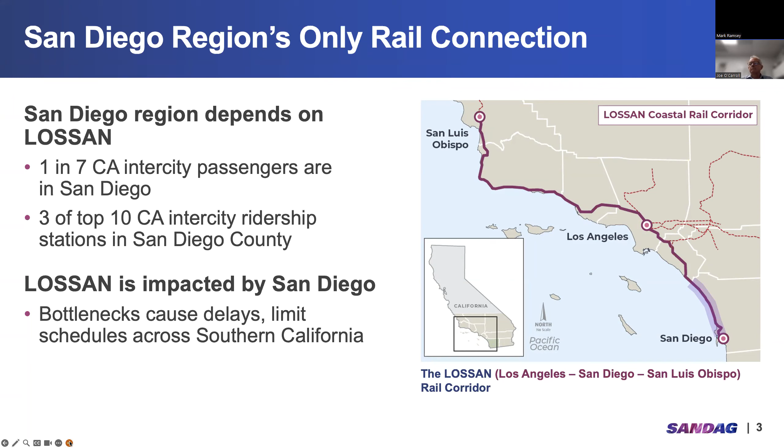And with rail corridors, it's a little bit different than highways. There are bottlenecks that exist here in San Diego and bottlenecks in other parts of the corridor that limit schedules across Southern California. So the single track bottleneck in San Diego limits how much train service can be added all throughout Southern California. We're all connected. Go to the next slide.

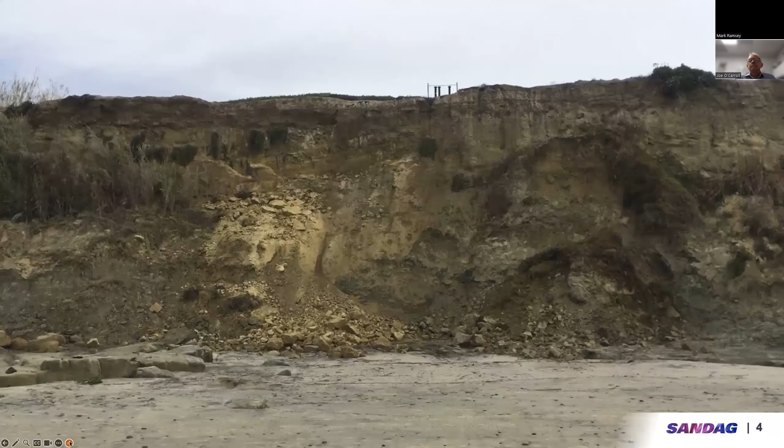And we wanted to share a video because if a picture says 1,000 words, this is just exponential. Many of you in Del Mar are familiar with how close the train is to the edge of the bluffs here in Del Mar. It's just inches away. This is vulnerable infrastructure. This was a video from 2019 that was captured and provided by the Scripps Institution of Oceanography that demonstrates a bluff collapse in Del Mar. And the rail corridor is right on top of those bluffs.

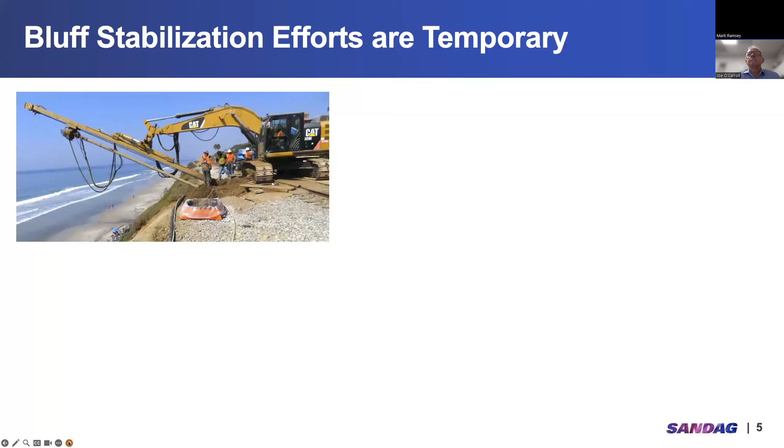This was a relatively minor bluff collapse, but this is a very common occurrence. We've seen up to 6 inches of erosion per year. And we've spent a lot of time and effort to stabilize the bluffs. All these bluff stabilization efforts with piles and tiebacks and seawalls and drainage improvements, they're all temporary. We do need to find a permanent solution to keep this rail corridor in operation for the long term.

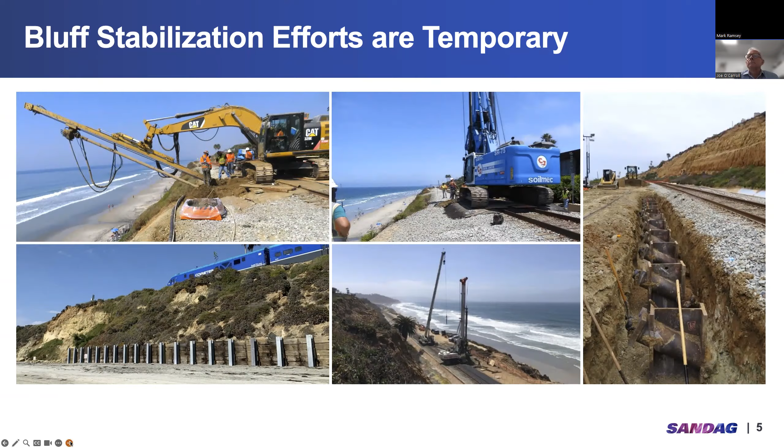And the next slide shows a timeline over the last 20 years or so of the stabilization efforts. And what you can see is we're about to start phase 5 of Bluff Stabilization. And in total, we've had over $100 million of investments just to keep these bluffs stable and safe for trains to operate. But it's not the ultimate permanent solution, which is to ultimately relocate the tracks.

And the little icons you see on there, little yellow diamonds, represent bluff collapses that have occurred that have impacted rail service where the train is shut down. It makes it less reliable. And then we've also had emergency repairs in response to some of these bluff collapses. So this is a constant maintenance issue, and it takes a lot of resources to maintain the tracks on the bluffs.

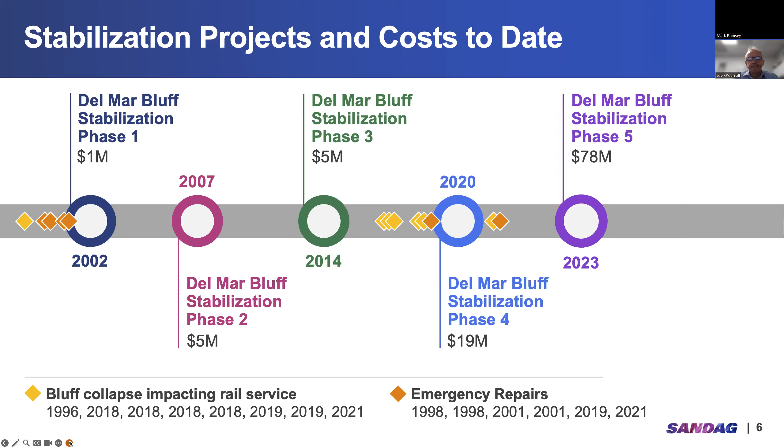Next slide, please. And it's not just the bluffs. We have other vulnerabilities all across San Diego. We have old bridges that are a century old. And these are wooden trestles that are beyond their useful life. It takes a lot of money to keep them stable and safe. And we have plans to address all these vulnerabilities, and we have funding. And pleased to announce that Batiquitos Lagoon was recently funded by the state of California to be replaced. So that bridge will be the next one to be replaced with modern, resilient, safe concrete bridges.

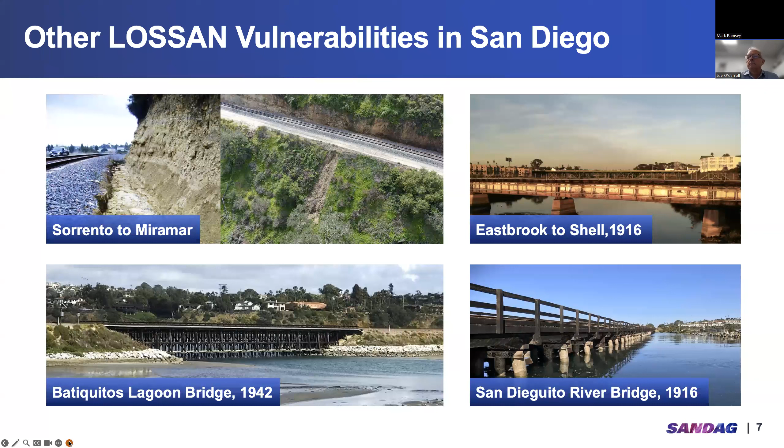And it's not just about keeping the rail corridor safe. We're investing in this corridor. The region has committed to investing in the LOSSAN corridor as part of the Transit Leap vision. So the 2021 regional plan identified the LOSSAN corridor as that long-term, fast, safe, reliable, and resilient rail corridor, that transit service that can connect from where people live to where people want to go conveniently and reliably.

All these investments, so it's not just the realignment in Del Mar, it's all the other double tracks, the upgrades of the bridges, will result in a Surfliner train once per hour in each direction all throughout the day, and Coaster trains up to 3 of them per hour in each direction. Ultimately getting to a travel time between Oceanside and downtown within 33 minutes. So that is the vision for 2050, and it's talking about zero emission trains.

And it's really a fundamental change in what this rail corridor is, because if anybody rides a train now, there's large gaps in the service. I hear people say that it's not frequent enough. Well, this plan that we have, the Transit Leap vision, will address all of those. Next slide, please.

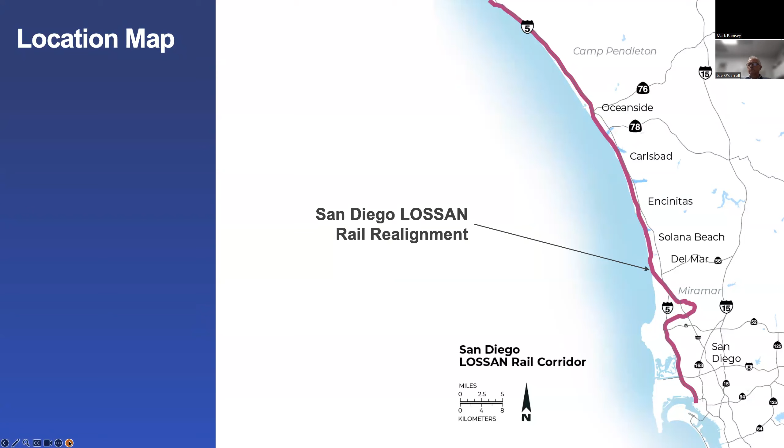So thanks, Danny. Yeah, I think it's important, right? We've put out what our goals are as we're thinking about this project, but we want to hear from all of you. What's important to you when you think about the realignment project? For some, you're really thinking about how can we move people and goods up the I-5 corridor on the rail corridor? Are you looking for a safe and reliable way to ride the train? Are you worried about climate change and how that's going to impact our ability to have a rail corridor, whether it's for freight or for people?

Are you trying to get to LA faster on the train? Are you just tired of seeing all the work that we're doing to stabilize the bluffs and want us to move forward with a long-term solution? What really resonates with you when you think about this project? Let's see what our answers are. Let's see.

Okay, it looks like more than a third of folks said faster travel by train was their top goal for the realignment project. And that's followed by building resilient infrastructure in response to climate change. Danny, are you surprised by any of those answers?

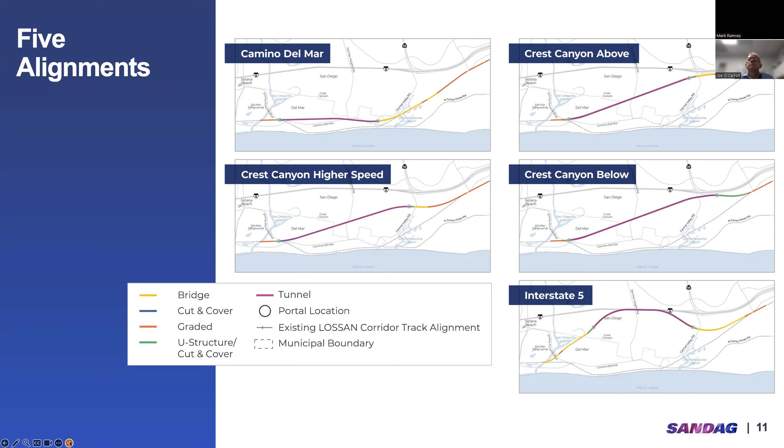All right, so let's continue on to the next slide here. Okay, so in August, we released and publicly posted our alternatives analysis, and in that analysis, we analyzed 5 different alignments, and those are shown here on this screen. And we identified whether there's tunnel locations or bridge structure, and identified where those portal locations are. A portal is essentially where the tunnel goes from above ground into below ground. So we have these 5 alignments that we studied, and we'll go on to the next slide.

So we've presented that information previously, but we also heard from the public about this one as well. And we have a couple clicks on this one, I believe, but these 3, yeah, for this first one here. So these 3 portal options were first identified and presented, but we also heard that, hey, we want to keep these portals away from private property and away from homes. And can you look at other options for where these portals could go? And so we did that as part of this study, and that's shown on the report on our website.

So we looked at what it would take to put a portal in the fairgrounds, or near the roundabout there on Jimmy Durante, or up by Crest Canyon over there on I-5. And we've studied that. That is in section 3.6 of the alternatives analysis, and definitely point you to the website to read more about all the pros and cons of those.

And then we have one more click, and we have these other portal alternatives that we looked at and are continuing to look at in a lot more detail right now. These are on the north side there, which is on the left side, a portal location that would be basically away from private property and under the roadways of Jimmy Durante and Camino del Mar. So basically under that intersection, and that has different trade-offs, but addresses that comment that we've heard about keeping the portals away from private properties.

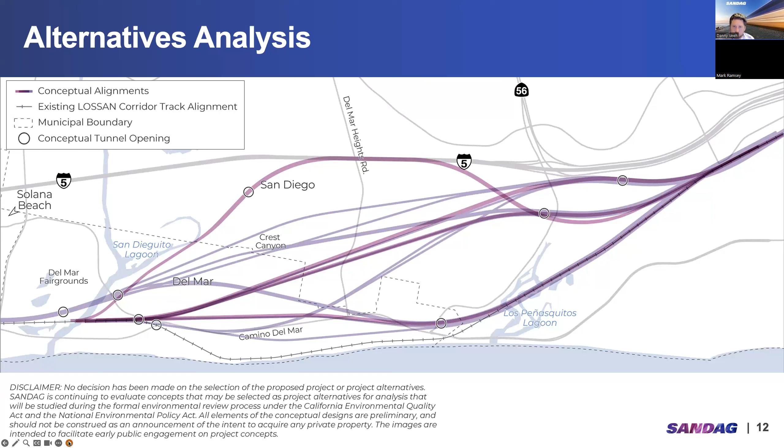That's right. Yes. Meaning we're studying all of these different options, and we also want to hear if there's other options we should be considering still. That's right. Okay, thank you.

And there's really no way around the hill in Del Mar unless it's on the bluff. And we've talked about the issues with maintaining the tracks on the bluff. So really the only way to do that is to put it in an underground tunnel. And the other thing is surface impacts. Sure, we could probably build a large bridge or grade a big berm somewhere. But our goal of the project is to minimize surface impacts. And the best way to do that is to put the infrastructure underground. That's why we're considering a tunnel in this environment.

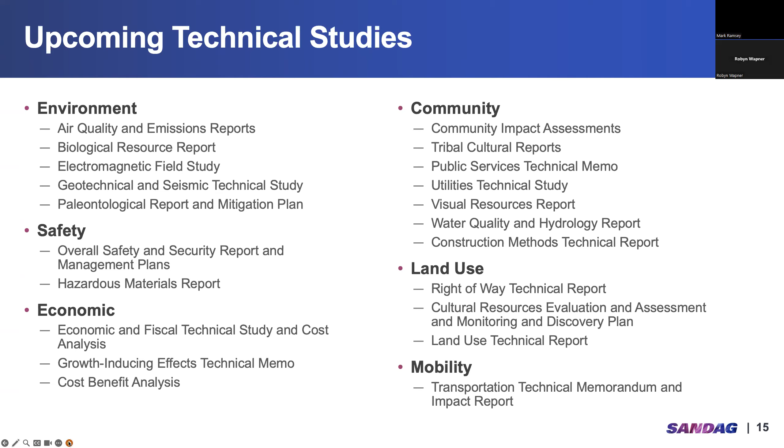And we have a lot of work to do over the next several years as we continue to study these alignments and these alternatives. This is just a list of some of the technical studies that the technical team will be working on from now until 2025. And next, I wanted to just pass it off to Joe, who will talk about tunneling.

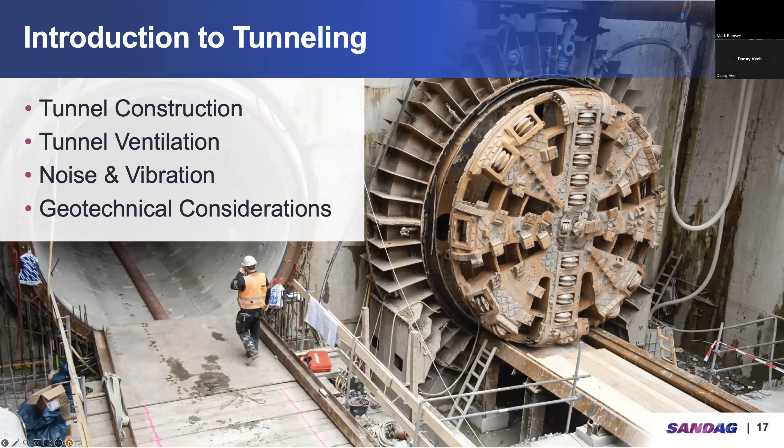Thank you, Danny. Good evening, and I'm pleased to have another opportunity to talk with everyone. At some of our previous meetings, we've heard a lot of good questions, but I know we have a much broader audience, I see from the polling earlier this evening. So in this brief presentation, I'll address a lot of the questions that we've heard to date, but characterize them in four broad categories: tunnel construction, tunnel ventilation, noise and vibration, and also the geotechnical considerations. So let's jump straight in.

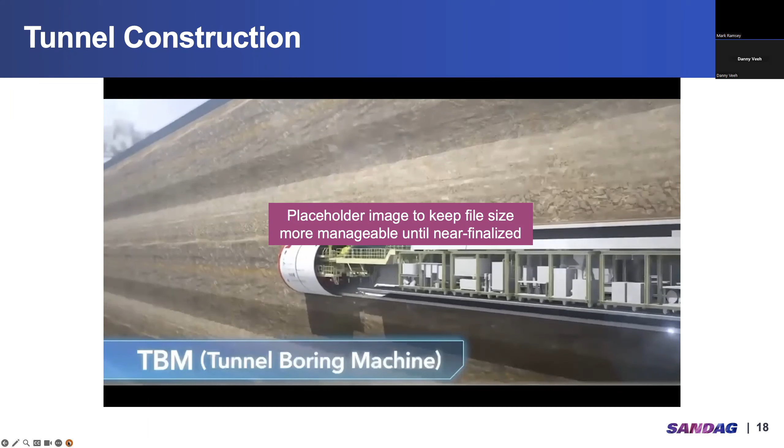There are various methods of excavating a tunnel. The choice is usually driven primarily by the ground conditions, but also by the length, the size, the location, and the cost effectiveness. But here in Del Mar, our primary concern will be the safety and control of ground movement to avoid any settlement or other impacts to property, structures, utilities above the tunnel. And we know that this is best achieved using a tunnel boring machine. So I'm going to explain a little bit more about that.

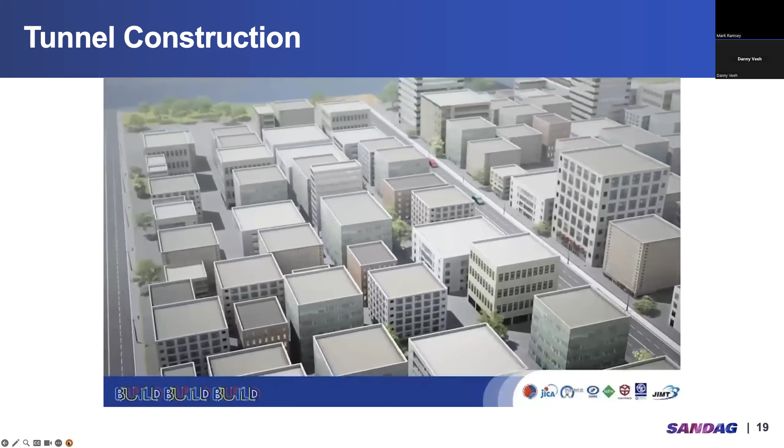So think of the tunnel boring machine as an underground factory moving through the ground, building the tunnel behind it as it goes. Each step in the process is designed to support the ground in front of, around, and behind it, preventing any settlement occurring above the tunnel at the surface. The excavated ground passes through a rotating cutter head, as you see on the screen here, and into a chamber behind it, then extracted out through a screw conveyor.

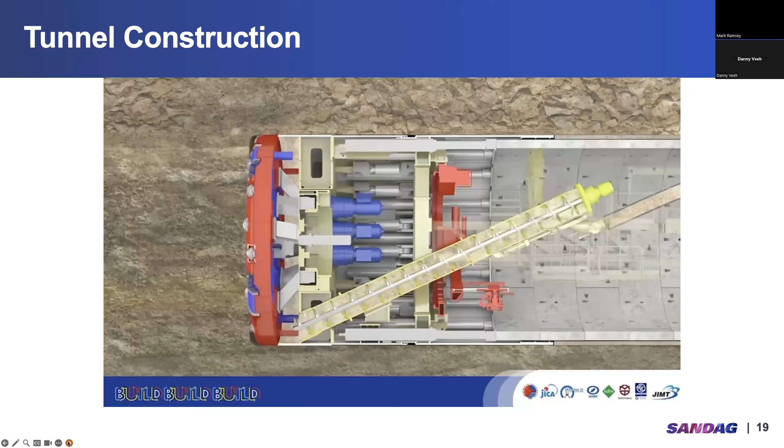With the soil in the chamber and the screw conveyor working in harmony with the TBM advancing, you have a very controlled method of excavation. Additives are also injected into the cutter head to help condition the ground to always maintain that pressurized plug that you see in the screw conveyor. And this is what we call earth pressure balance TBM tunneling.

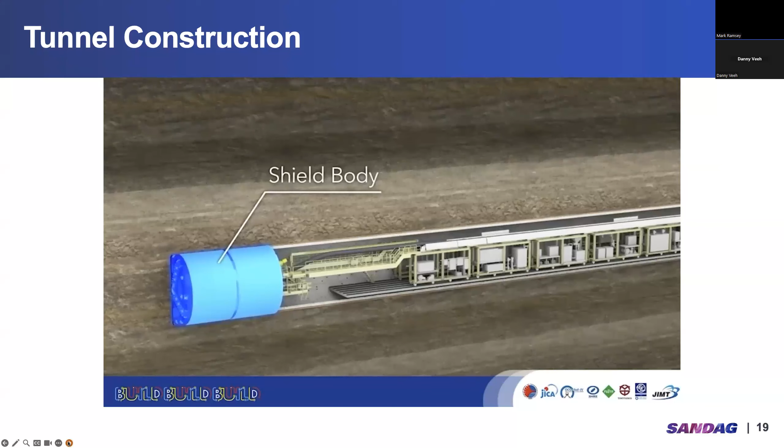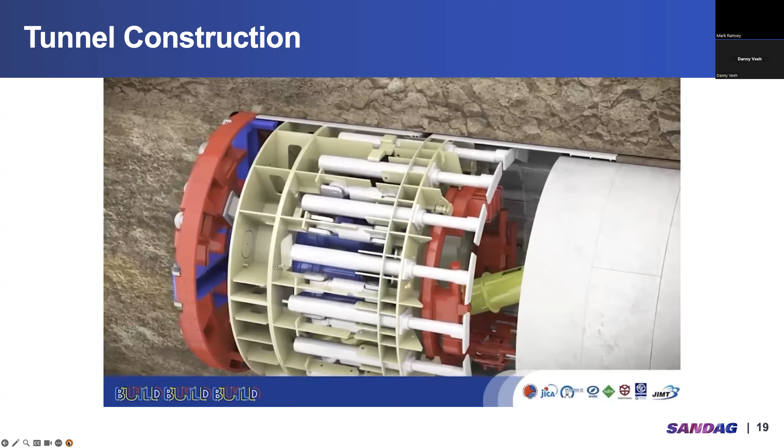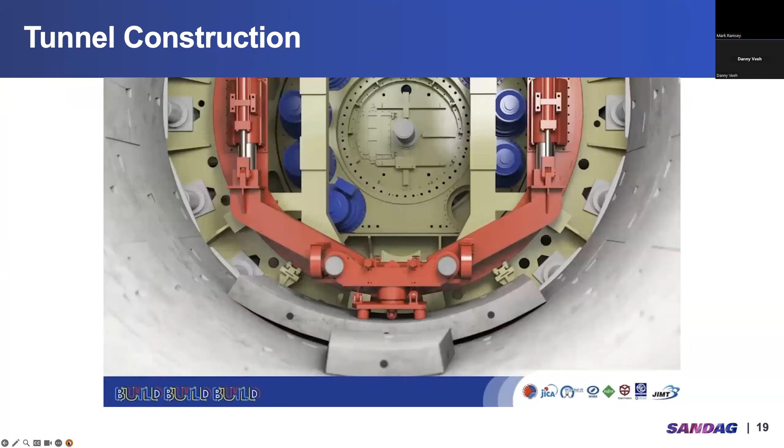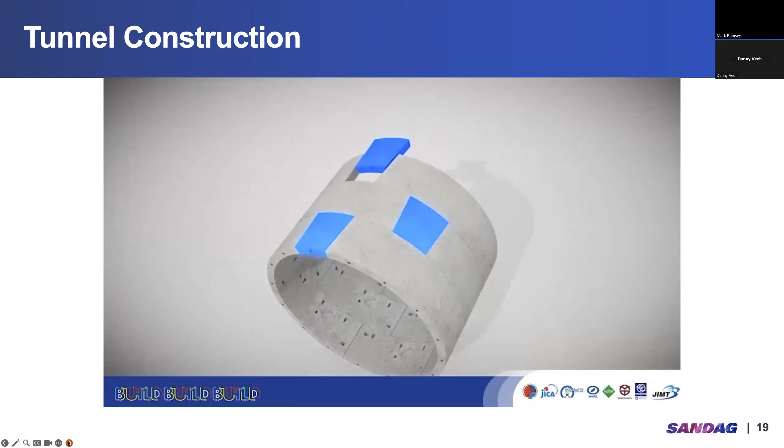The TBM has two main parts, the shield body and the backup system. The TBM is propelled forward using a system of thrust jacks. And the tunnel lining is built using precast concrete segments bolted together within the shield. The whole cycle is repeated ring after ring after ring. And when all this works smoothly, we expect to be able to build this tunnel at an average rate of about 300 feet of tunneling a week.

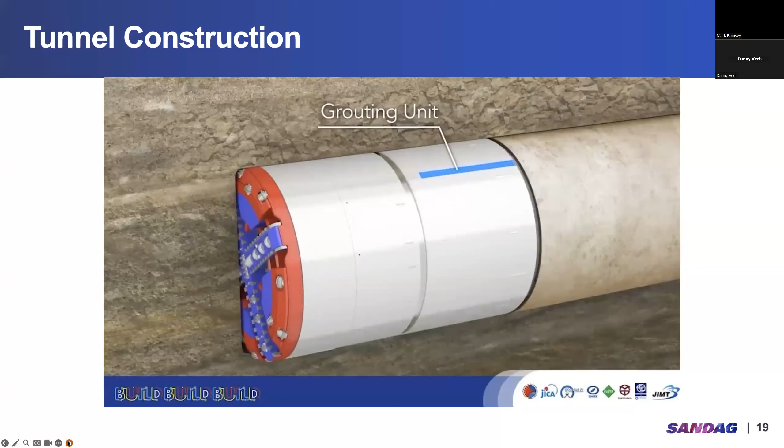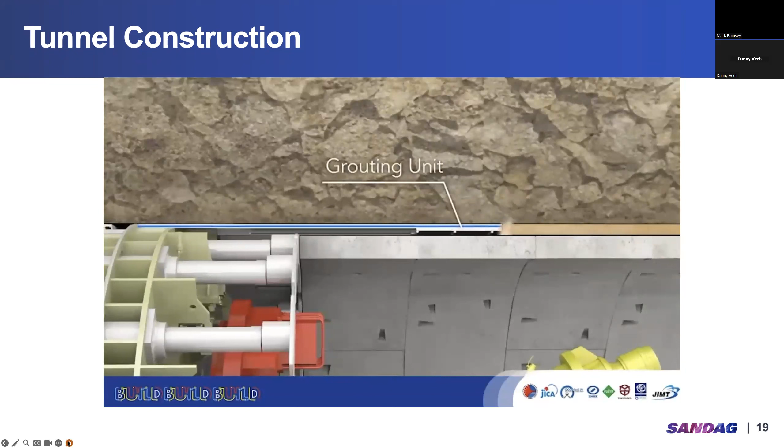Filling the gap behind the tunnel lining is really important. And we do that with a cement grout. This actually prevents any movement from occurring after the tunnel is built. We think of this as leaving no gap behind. Everything is solid and integral with the ground around the tunnel, eliminating any settlement being able to happen after the tunnel is complete. If we go to the next slide there. Thanks. So now that we know a little bit more about how the tunnel would be built, let's talk about the depth and why, as Danny mentioned, the topography here is really in our favor.

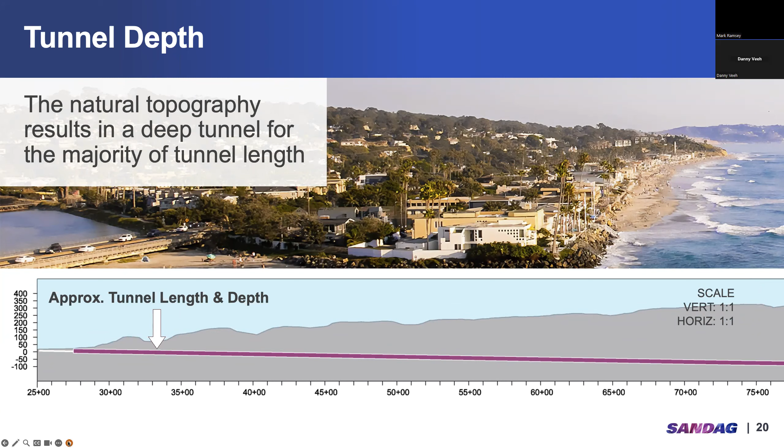To put this in perspective, I spent 5 years as an engineer on the Channel Tunnel between England and France, and we had a similar amount of ground cover as we see here, but to the underside, the bottom of the ocean. So, we're very, very confident about the tunneling, this technology in the ground conditions that we have already begun to really understand in Del Mar.

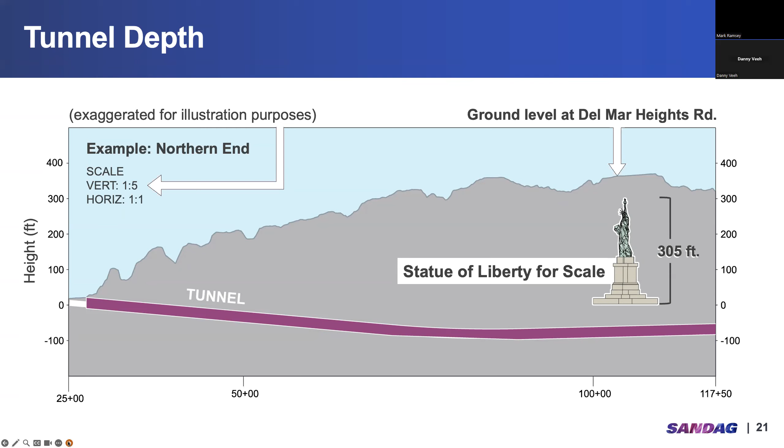Next slide. At previous meetings and probably in the alternative analysis report that is on SANDAG's website, you will have heard or read about options that are being studied, and this includes terms such as a single bore and a twin bore tunnel. In a single bore, we'd have both tracks in one larger tunnel, separated by a dividing wall that acts as protection and for safe emergency egress and evacuation.

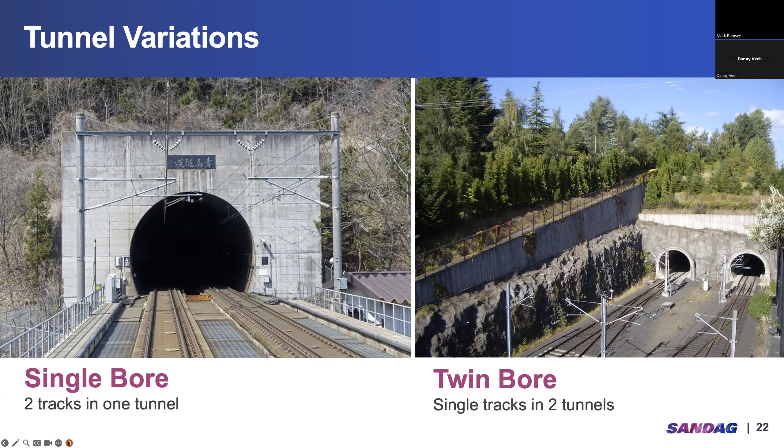Next slide. So whether the selected option is a single bore or a twin bore solution, the size of the tunnel is well within the envelope of current TBM, tunnel boring machine technology. We've probably designed and built over 200 tunnels of this type just here in the US and around the world in the past decade or more. One such example, which is ongoing at the moment, is the Hampton Roads Tunnel in Virginia.

This TBM is named Mary, actually, and it's tradition to name TBMs these days, and we usually invite children in the local elementary or middle schools to come up with a name. We found that giving them a connection to the project, and they can go online and track progress, is really valuable to community understanding of what's going on beneath them.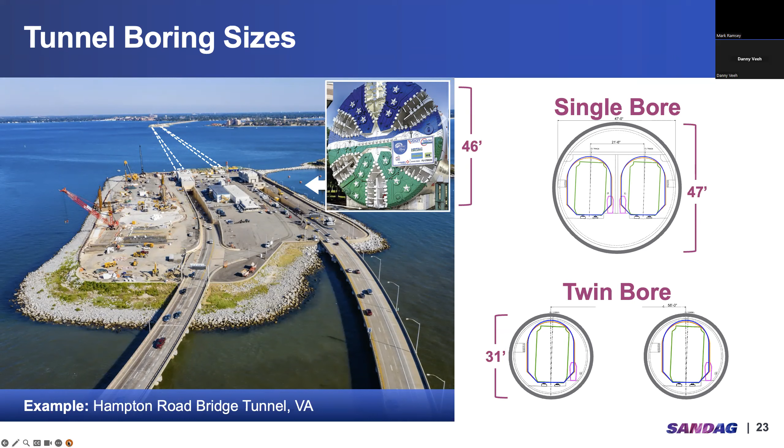So it doesn't leak, and we make sure we don't have any impacts on the groundwater table, which is really important, particularly at the south end of the tunnel in the lagoon. So this type of tunneling is also environmentally friendly in that respect.

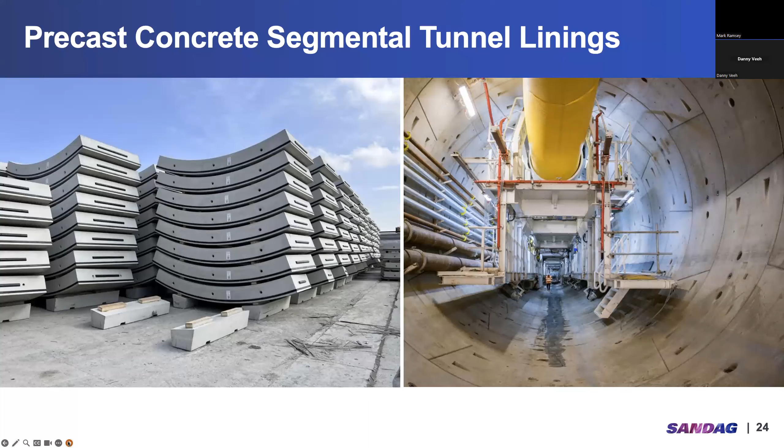The picture on the right is looking at the back of the TBM, and as I mentioned, this is an underground factory, and the length of all the supporting equipment that we saw earlier is about 300 feet long. The yellow bagging at the top of the tunnel is used to push air to the TBM to ventilate it during construction, until the TBM exits the far end of the tunnel and then becomes naturally ventilated.

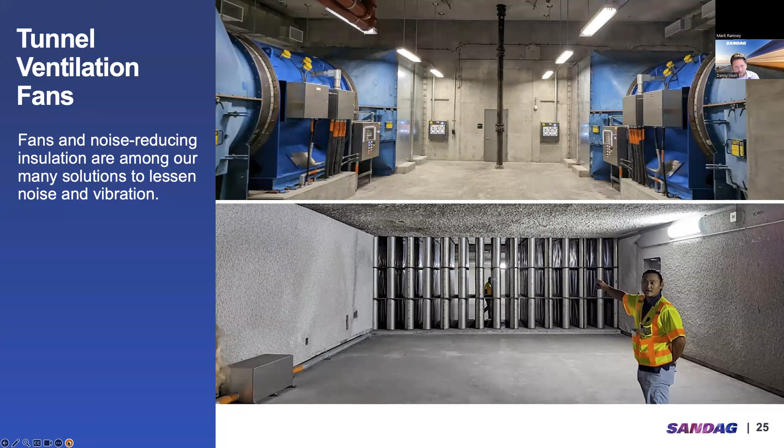When the fans are on, and you're standing on the other side of these baffles, you can hardly hear them. In fact, Danny visited that project recently and experienced it for yourself, Danny, didn't you? Yes, sir. So next slide, please.

During construction, the noise and vibration is also really important to us. Both will be continuously monitored during tunneling. Monitors send real-time alerts to the construction supervisors, and if the limits that are set out in the environmental reports are exceeded, immediate action is taken. It's really important to understand that it's our goal to absolutely stay within the environmental impact mitigations at all times during construction.

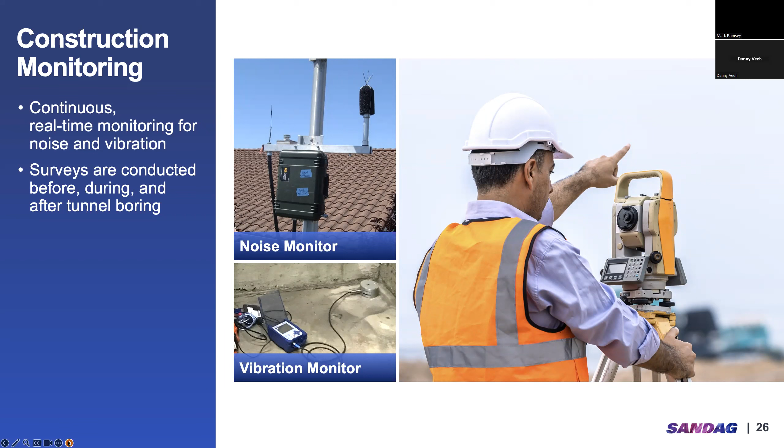We also carry out settlement monitoring, the ground movements I mentioned earlier with the actual operation of the tunneling. We do settlement monitoring at the surface throughout construction to verify that the construction of the tunnel and the ground is behaving exactly the way we designed it to.

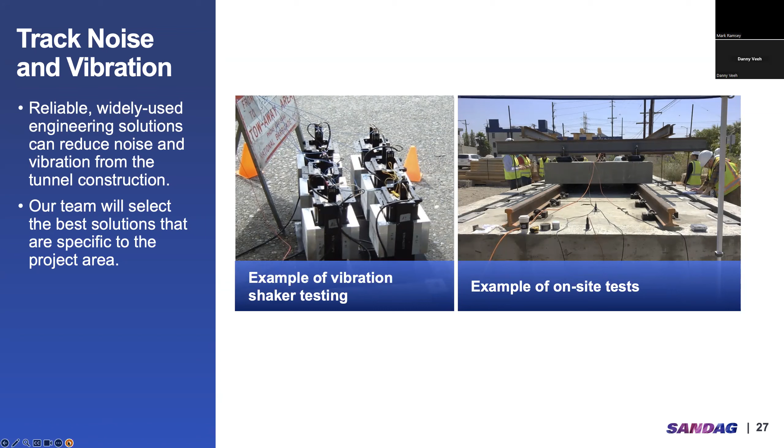So likewise with operational noise and vibrations, when trains are running, we do calculations during the design to determine the vibration absorption of the ground and design the track to meet these requirements. We also carry out mock-up trials to verify our assumptions and the calculations before building any of the track bed works in the tunnel itself. So again, whatever the environmental impact report says is the criteria that we'll always be working to.

So where are we today? Our team has a really good knowledge and understanding of the geology from previous experience, previous projects, and all the data from Caltrans' recent work and upgrades there on the I-5. We will be starting very soon a phased investigation program that is intended to fill in some of the gaps and verify what we already know. As the project develops, further phases of site investigations will be performed to obtain more location-specific data that supports the design and the construction.

As we start to build up a detailed geotechnical model of the entire project, we do have some flexibility as to where we do the boreholes that obtain this information, and at all times we keep the impacts to the community to a minimum during that investigation process. So I think that wraps it up from a tunneling perspective for this evening. Danny, I'll hand it back to you.

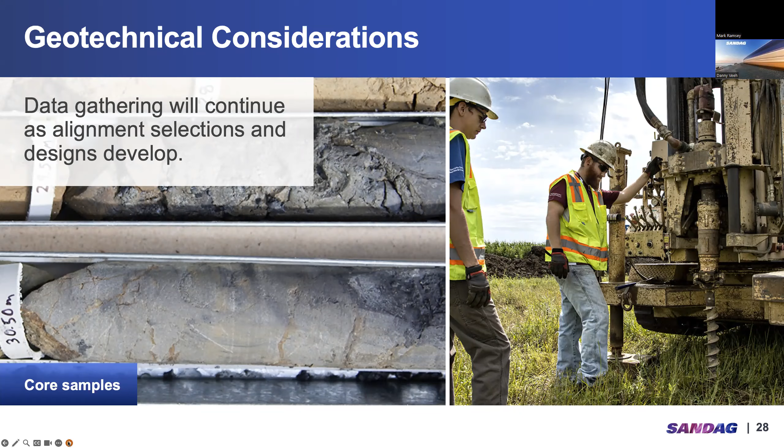All right, thank you, Joe. I really appreciate Joe and this consultant team that is going to help us deliver this project and do the design. We have truly world-class expertise working on this project, and we have full confidence that we can deliver this project, and we're not doing anything that's experimental. This all meets engineering standards, and basically we've got world-class expertise on here.

All right, now onto the timeline for this project, where we are and what phase we're in. We are just beginning the preliminary engineering and environmental phase. Starting in 2023, since February, we've been conducting environmental surveys as well as analyzing possible track routes and alignments, and we're going to continue to do that through the end of this calendar year. Public outreach is starting to ramp up and will continue to be robust throughout this preliminary engineering environmental phase.

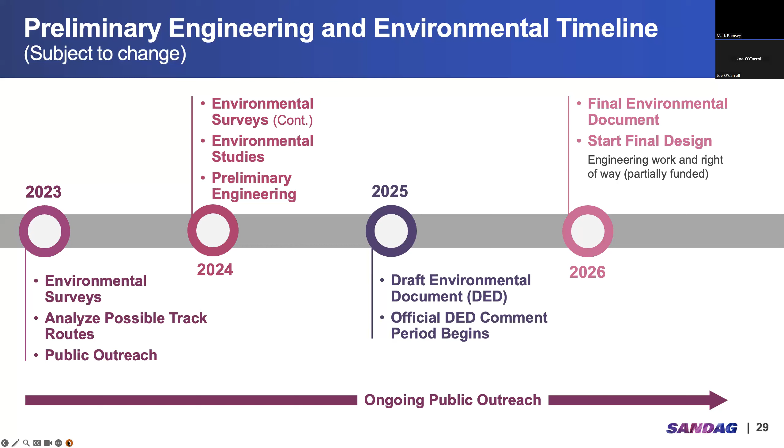Starting next year, we will begin some of those environmental studies and really jump into the preliminary engineering, starting some of those initial environmental meetings. All those technical studies that I briefly touched on with that list are going to be underway in 2024, ultimately leading up to a 2025 draft environmental document. Then there'll be an official comment period, and by 2026 we expect to have a final environmental document up for consideration. Go to the next slide. That gets us from 2023 to 2026.

I should mention that we have funding from the state. We have $300 million that's going to fully fund this project from the preliminary engineering environmental phase all the way through final design. We are still looking for construction funds, but we have until 2028, when we're ready for construction, to find the $3 to $4 billion it'll need to actually construct this project. We have about a 7-year construction period, and that puts us on track to open this project to the public and start running trains in 2035.

And I think we wanted to go to a polling question, or is that... Yeah. So before we get into the FAQs and the Q&A section, we've shared a lot of information with you over the last 30 minutes or so. And so hopefully we've answered some of your questions. Hopefully we've talked about some of the goals that you said were important to you, but we also understand there's going to be things that raise additional questions, right? Or that you might have concerns with, and we want to know what those are.

So if we can just ask you one more time to answer a question, we want to hear, what potential issues are you most concerned about now that you've heard everything we had to share tonight? Some of the options that we have for you are construction traffic or construction road closures, any disruptions to rail travel if you take the train while we're constructing the project, what impacts might be to private property, or what sort of vibration will be experienced as a result of tunneling, noise and vibration, where the portal locations might be, or any sort of effects on natural ecosystems.

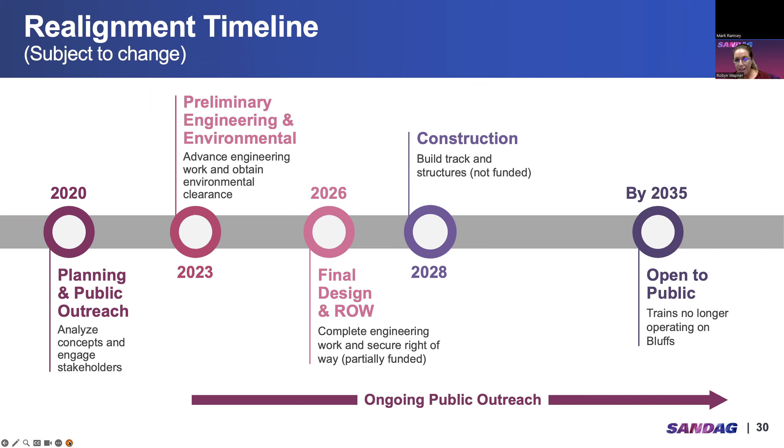So first up, Danny, I'm going to go to you. We're talking a lot about this project, but what's actually going on? What's the status? Yep, thanks, Robyn. So yeah, we recently completed the 2023 alternatives analysis, which is posted on our website. And that's really your best source for the work that we've done to date. I really recommend anybody that's interested in learning about the project to read that. And there's a technical appendix in there as well that identifies everything we've worked on to date.

But what we're looking at going forward is, like I mentioned, there were these other alignments that we're looking at. And so in the next few months, we are definitely refining those. We're doing some engineering work on bringing all these other alignments and these portal locations up to the same level of design, which is about 10%, as the alternatives analysis alignments. But we still have a long way to go.

So we are just at the very beginning of the environmental phase. We'll officially kick that off next year, and also aim to have that 30% design so that we can inform everybody, including the decision makers that will consider the environmental process, about all the potential impacts, and also more about the design, right?

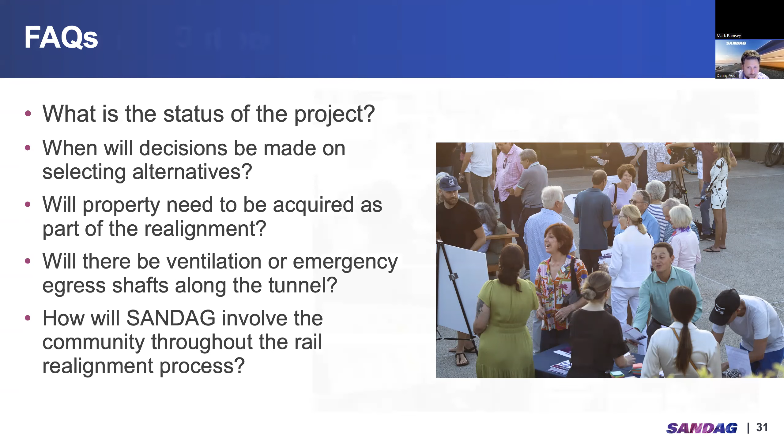We know there's a lot of interest in the I-5 alignment, something looking at the fairgrounds, and so we want to hear from everyone. Let us know what your questions and ideas are so that we can really do our due diligence and learn as much as we can while we move forward. In addition to those two workshops, we are starting our community field office, as I mentioned, in November, every Tuesday from 9 a.m. to 6 p.m. And that will be accompanied by virtual options as well.

One of our goals is really to be able to provide different modes for people to engage with us. So you're going to be seeing us throughout this project using in-person outreach events, online virtual events like this, emails, interactive websites. We'll be sending out things in the mail, any way that we think we can get in touch with you and offer you a meaningful way to participate. That's what we're going to try to do. So again, if you have any ideas on that, we always want to hear from you on the best way to talk and communicate with everyone.

I just want to highlight that while our series of workshops will be concluding on November 15th for this current phase, we fully intend to continue that conversation with you into next spring. So just stay tuned. Like I said, please sign up for our e-blast so that you know about any other upcoming events as soon as we schedule those, so that you know when you can join us.